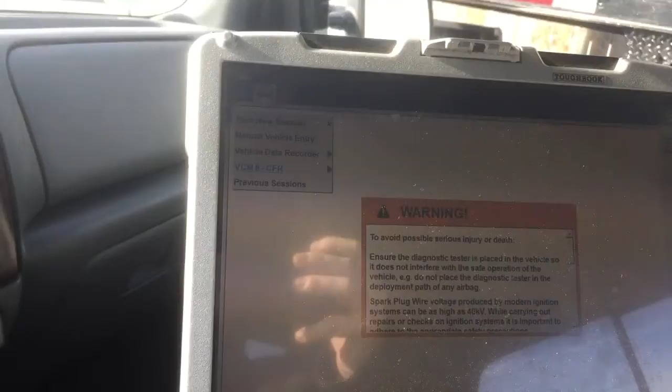This sun glare is going to be pretty bad, but we're going to go ahead and do a cold start. He's got exhaust manifolds leaking. I don't think he's got a Y pipe issue, I think it's exhaust manifolds. We'll take a closer look later. But he's got injector issues too. We are going to do a cold start here and take a look.

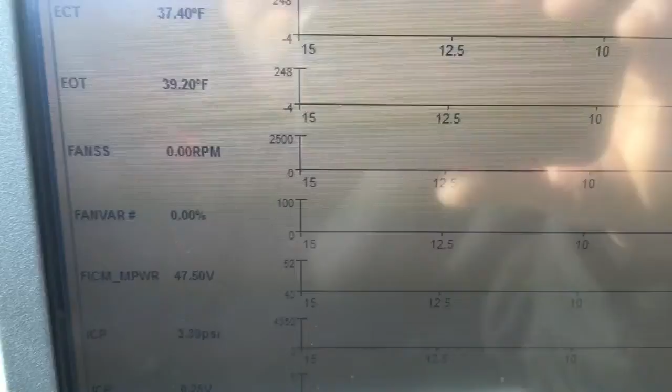Okay, I know this glare really sucks, but let's get it hooked up. FICM looks okay, let's go ahead and fire this thing up. Once the injector chatter stops, here we go.

Alright, here we go. Look at that, it just cleared up. Let's turn compensation off.

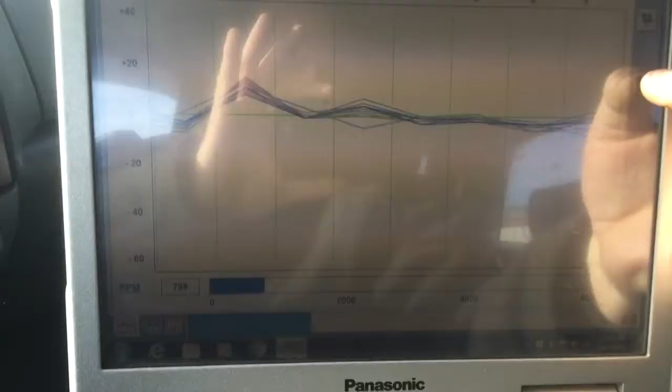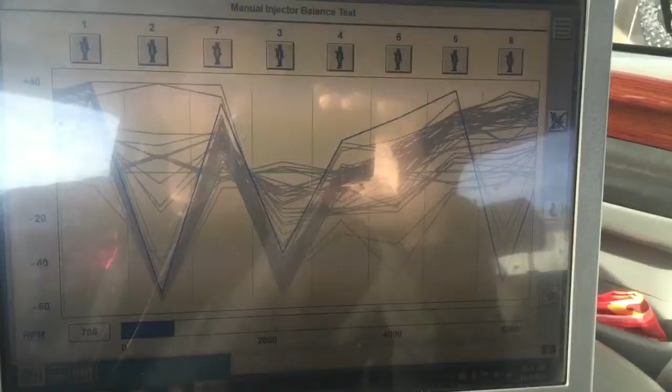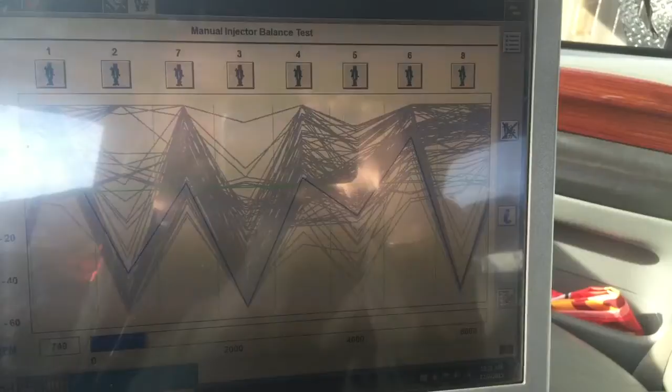I know that's hard to see. Looks like 2, 3, oh shit. 8. I wonder if that's a glow plug issue. I think it's 1, 3, 5, and 8. Or no, 2, 3, 5, and 8 are.

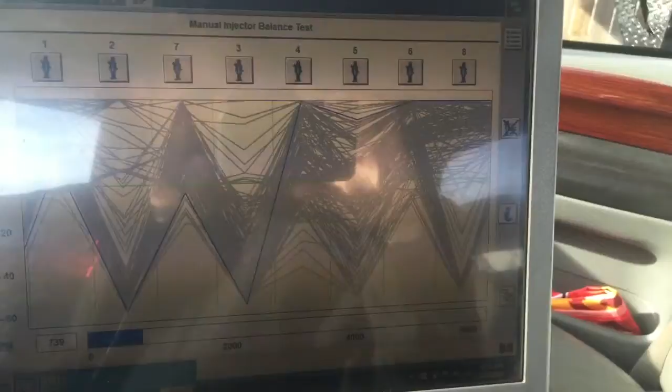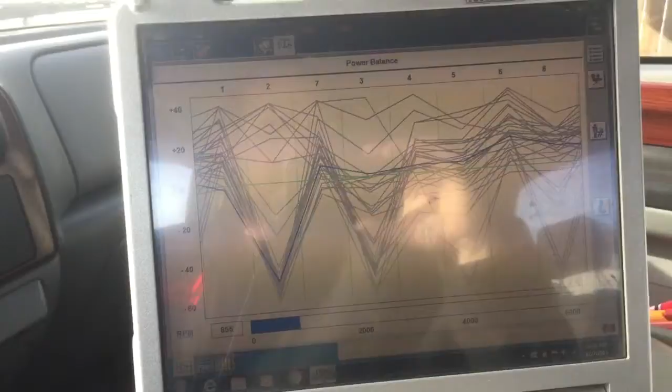That's a damn glow plug right there. Hang on, I'm gonna get this sucker. I'm gonna shut this. Maybe. That's all over the freaking place. I think we need to disconnect and reconnect this glow plug real quick. I'm gonna get it inside before it warms up.

Okay. I don't know, generally a fuel pump issue will show its butt whether the compensation is off or on.

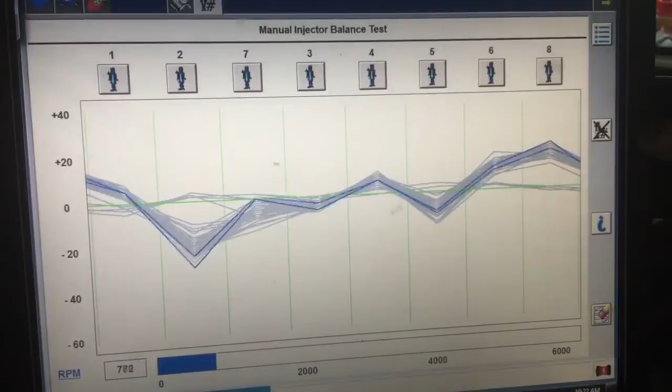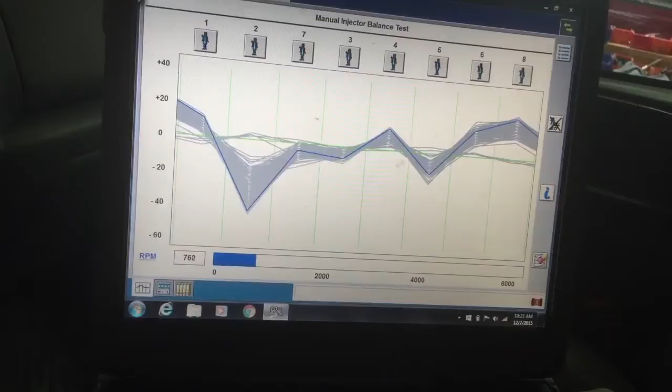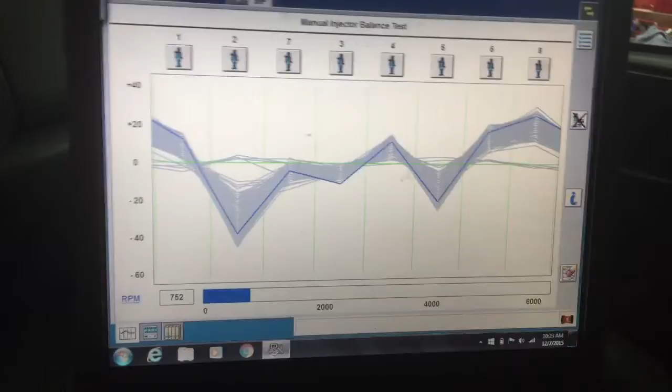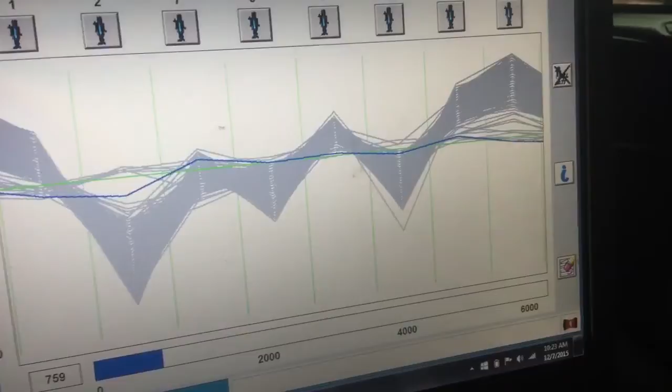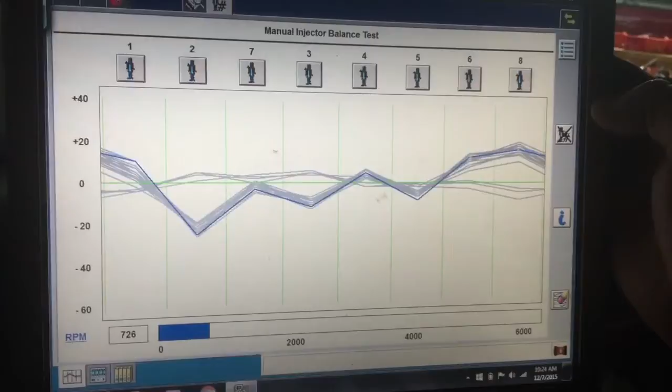It's inside now, but hang on a second. Freaking 2, 3, and 5. Up, just smoothed out. Let's see. Hell, I don't know, I mean, 2, 3, and 5.

Do we need the other ones? I mean, you can never go wrong with replacing the other ones, but I mean, we got 2, 3, and 5 right now. They're getting worse too. Or the idle just kicked up.

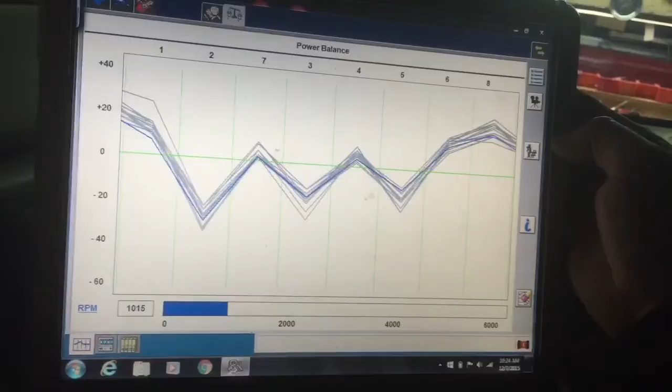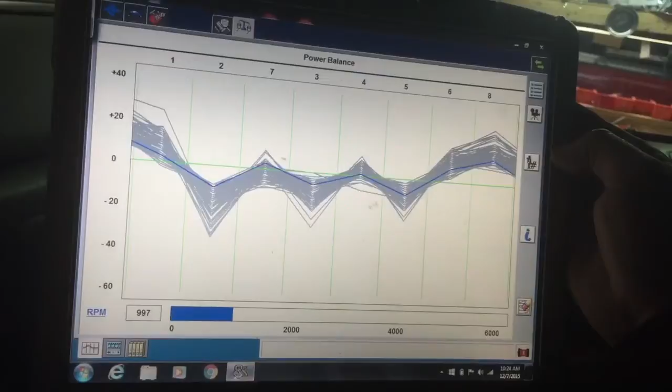See what happens, shut it off, see how long it takes to smooth out. Hang on. Okay, it's not doing too bad right now.

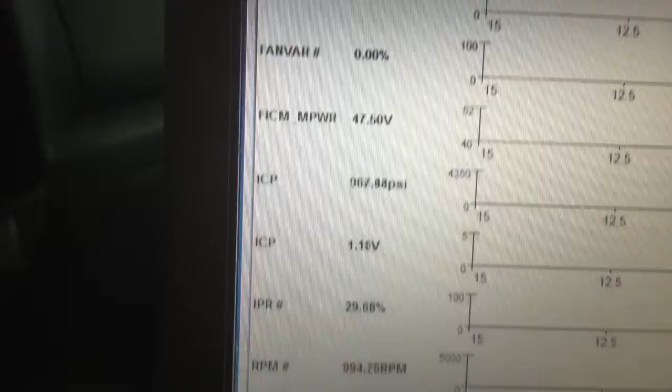Let's go look at our numbers. So our fan speed, I'm gonna pull some codes here. Let's pull some codes, see what we got. Okay, nothing on the codes. No contribution balance.

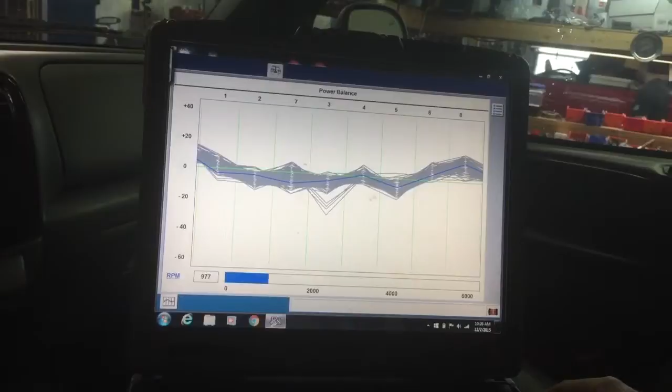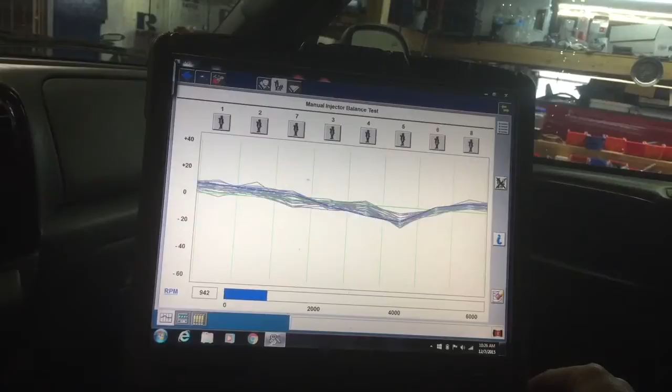But it's definitely, I mean, it's just stiction. That sucks, but you know, let's shut this. I mean, if the wallet allows it, can never go wrong with a full set.

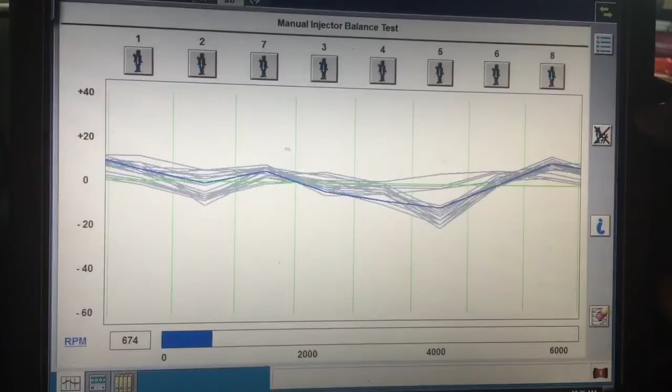Just constantly 2 and 5, 2, 3, and 5, 4 right in the middle of it, getting worked pretty hard. 7 getting worked pretty hard. Mainly it's 5. I mean, look at it taking 4 with it.

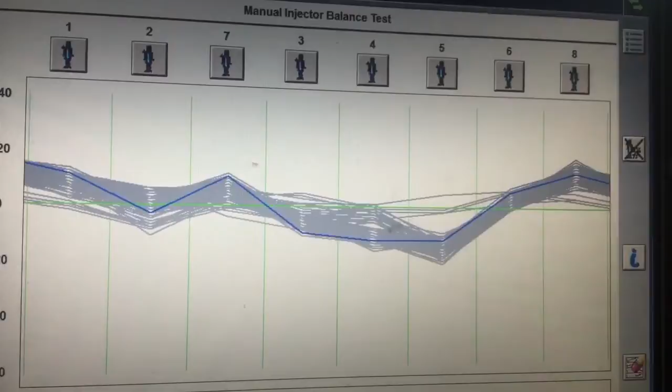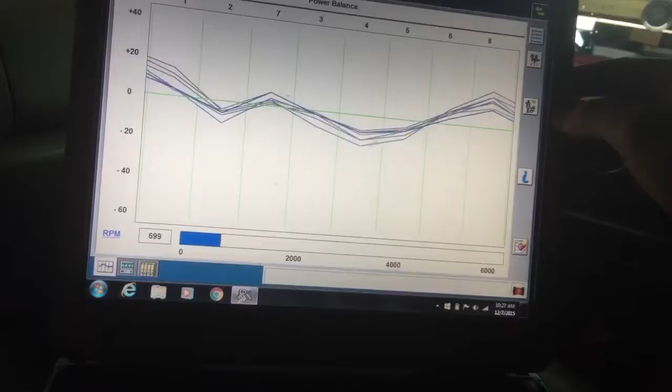The green line is the baseline, that's where we want to see it. 3. So now we're 2, 3, 4, 5. Yeah. Smooths out all right.

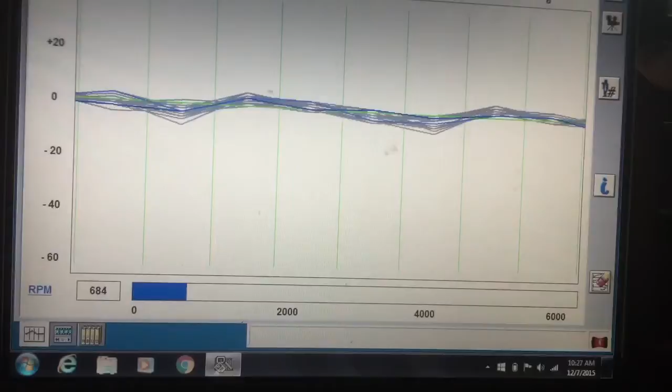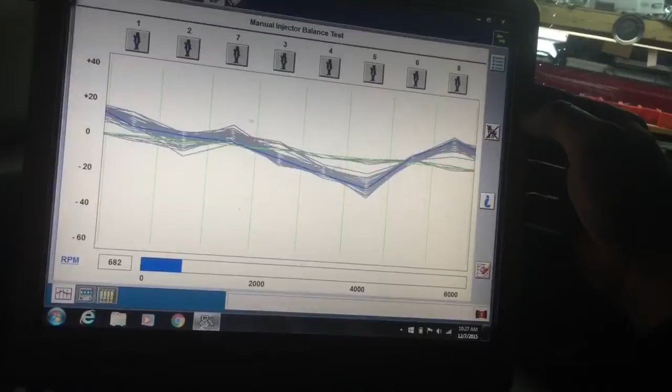We'll let it get up to temperature. We might take it for a drive. I thought it was the fuel pump, but we might... I mean, if it was, it would. It wouldn't be intermittent.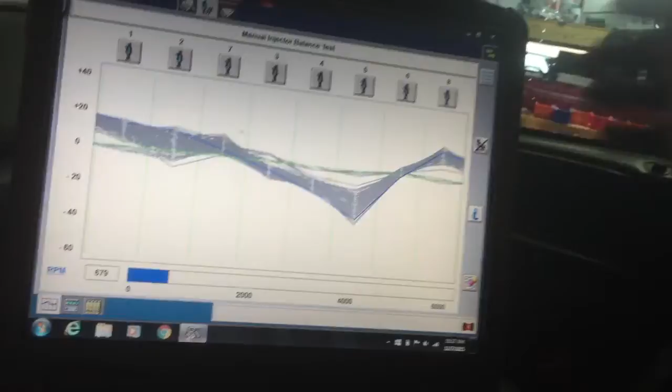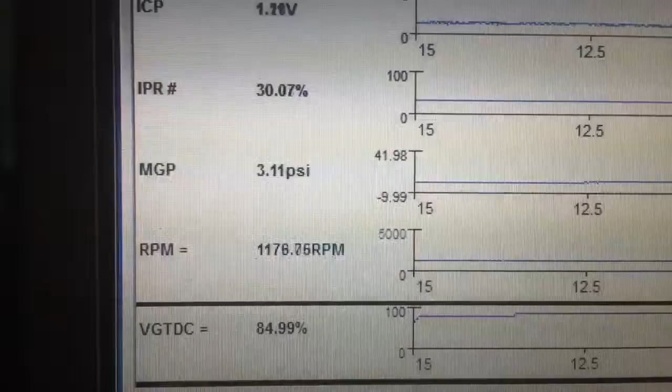Let's get a little more temperature in it. Okay, we want to see that manifold gauge pressure. I mean, it's boosting up at 1200 RPM. Got turbo all the way closed, and we're seeing 3. I mean, that's pretty damn good on the MGP.

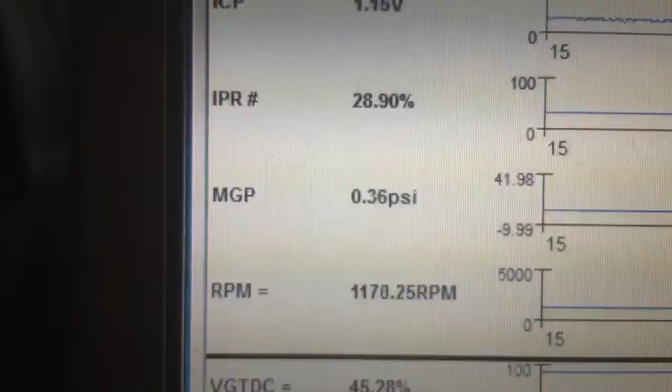And we know it snaps back to 0. Look, I turned the VGT down to 0, and the gauge pressure, so the turbo is not sticking. Now it's going up.

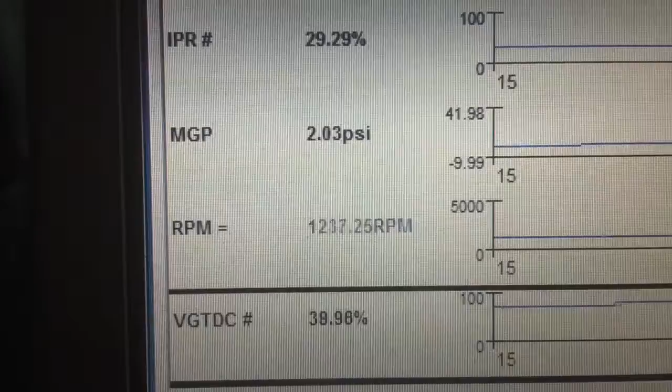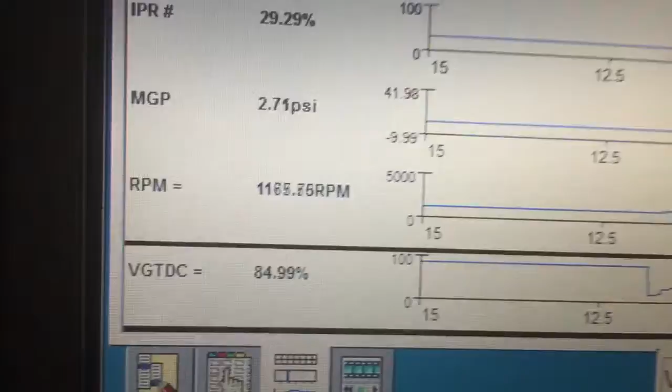So I guess he took it somewhere and they said it needed a turbo, but I mean, the turbo is not stuck shut, it's not stuck open. I can see by the MGP right there that the vanes are actually moving. I mean, it's not seized up, it's not stuck.

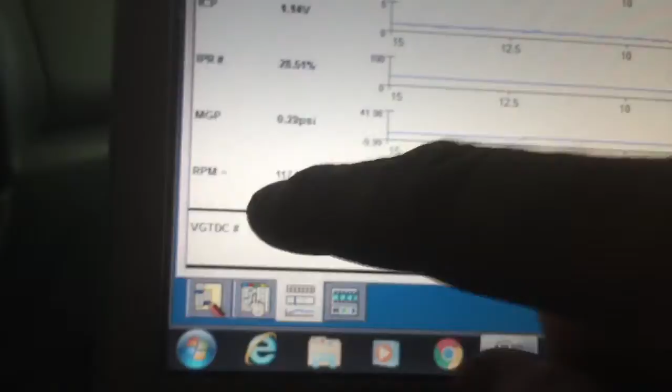Boosting pretty damn good too. I mean, normally I see like 2.1 out of the thing. Let me get underneath it real quick. Alright, here we go. I can definitely hear audible air coming out through the manifold.

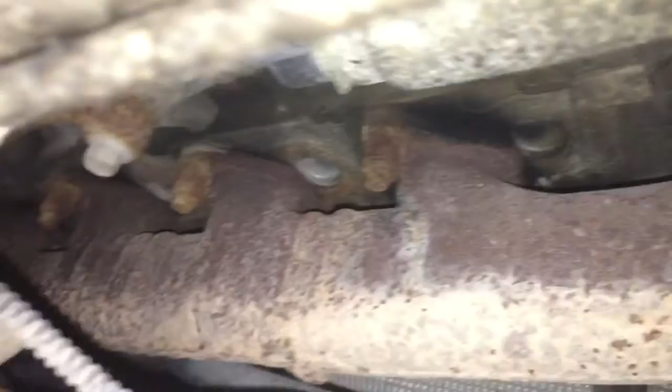I don't know if you can see way back there. Look at the other side. Side doesn't look as bad. Let's see if I can see the Y pipe up there. That's what I'm concerned with, the Y pipe too.

While we're going into it for the manifold, I mean, damn, sure would be nice to do a Y pipe and eliminate all exhaust concerns. But let's get up in here and look.

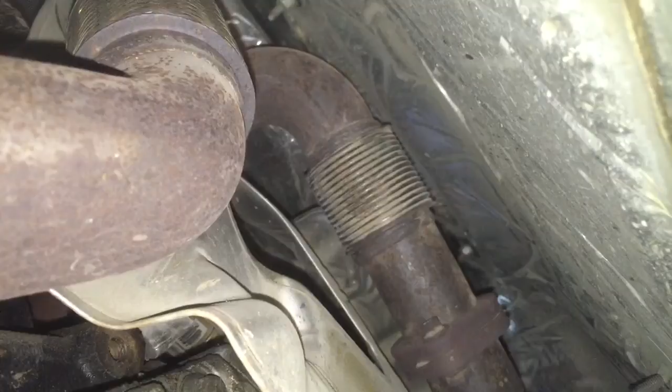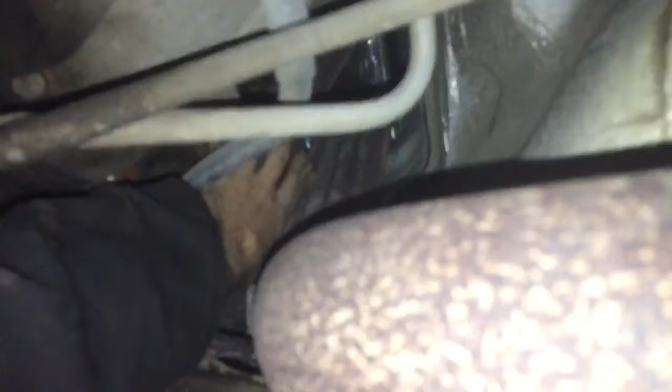Feel around the joint right here where the manifold meets the up-pipe and the Y pipe. Flex joints seem to be okay. Just looking around here, I think I have to...

Let's look at it. See much leaking? Look over here. See the trails around the turbo.

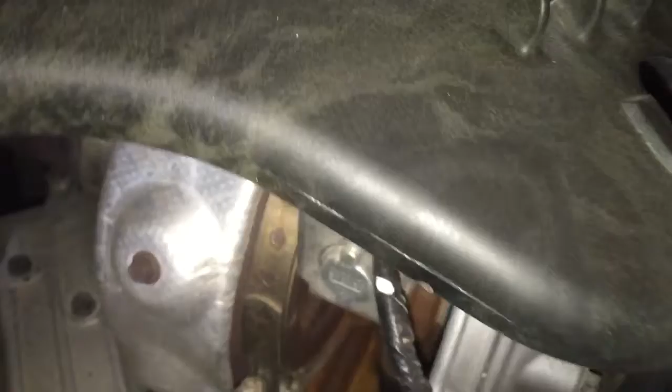High boost. That looks pretty good.

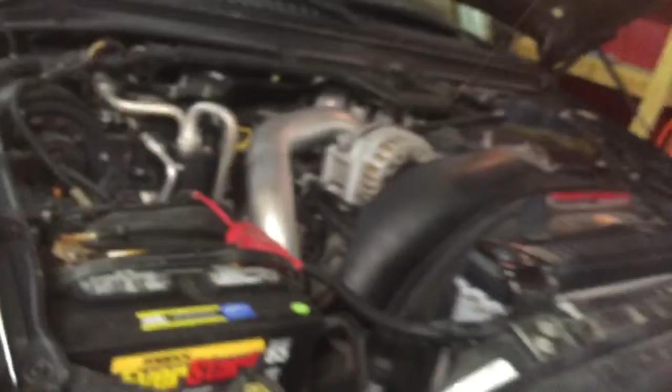So, I mean, the exhaust manifolds, the driver's side didn't seem near as bad as the passenger side. It was definitely, it's definitely spitting out exhaust. It's running pretty good right now.

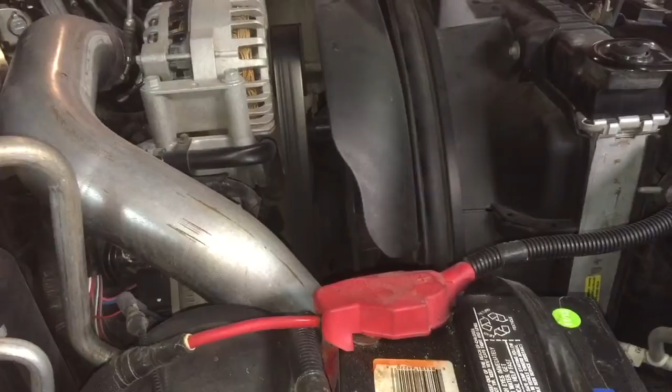Kind of a bummer to think that we're going to put a full set of injectors in it, because I mean, it's running good. But that freaking cold start is the son of a gun. I mean, you guys saw it, it was all over the place.

So let me... oh, shut this off. Let's go back here and see how clear it is.

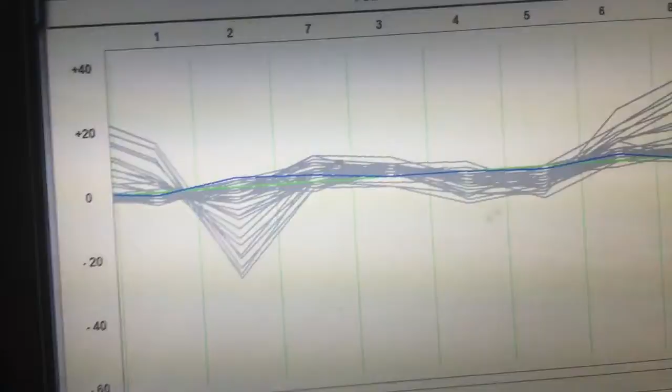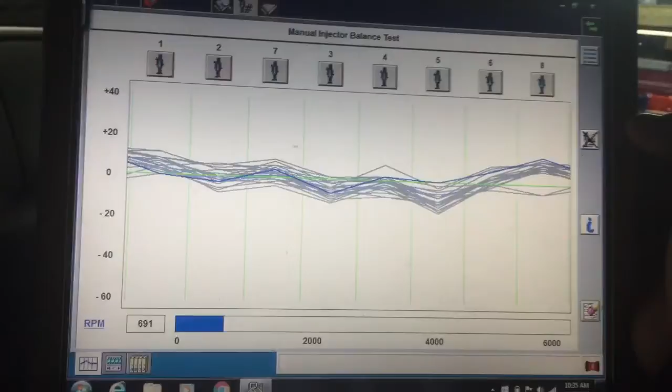Still 2, 3, and 5. See them dropping. Yeah. Which, hell, 2, 3, and 5. I mean, let's put a little load on it.

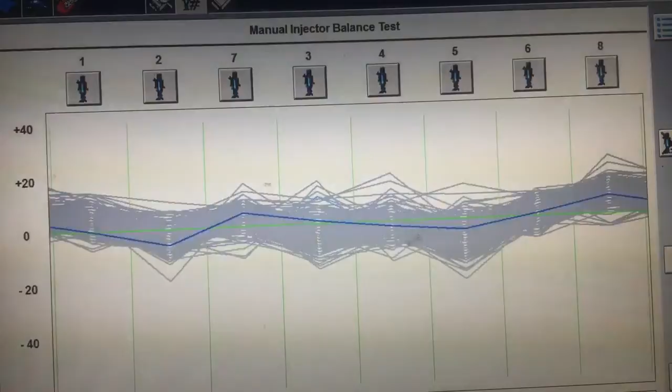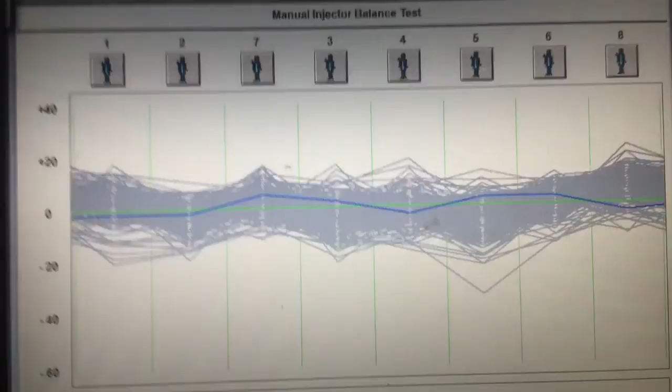Five dropping. You can feel it miss when it's doing it. I'm just recording it all. Heck with it.

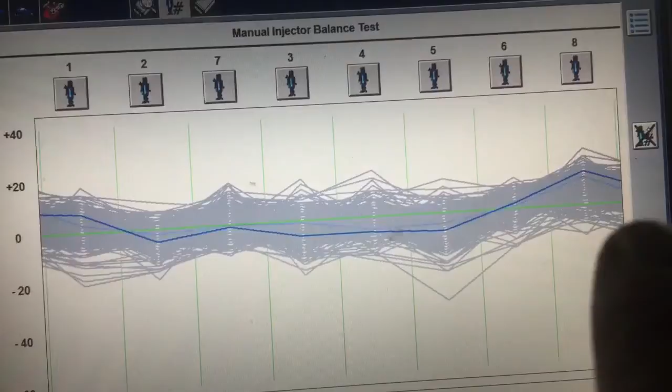We definitely got 2, 3, and 5 for sure. 4 was kind of showing us a little bit, and I think 8 was pretty bad at the very beginning. Damn, that sucks.

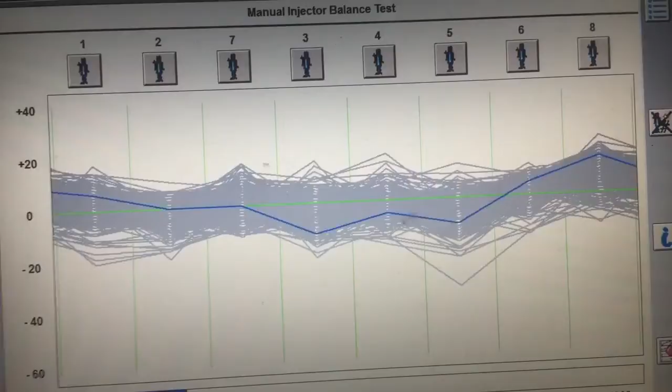I could feel it missing. 2, 3, and 5 are the main ones. And 4 isn't—4's just right in the middle, getting the crap beat out of it. So 4 is getting worked harder.

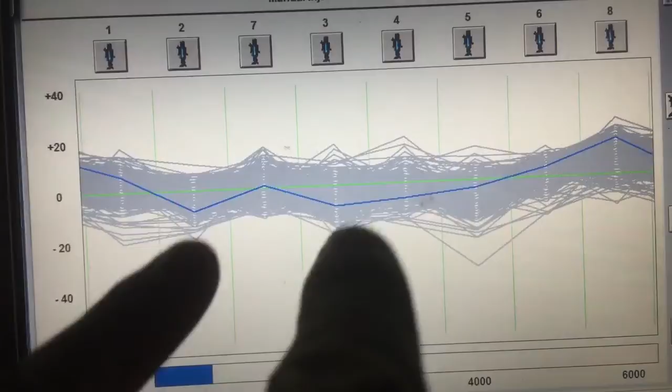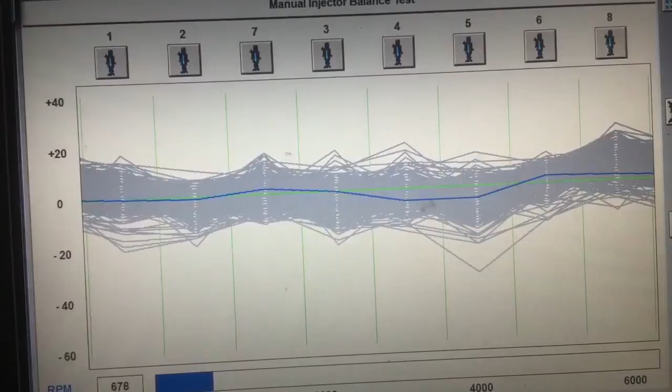But 2 and 3—see, right there, see how 2 goes down and 7 will actually compensate, and then it'll drop back down for 3. So 7's working, 7's still doing its thing. We got 1, 7, and 6 that aren't giving us any indications anything's wrong with them. 1, 7, and 6. Which, crap.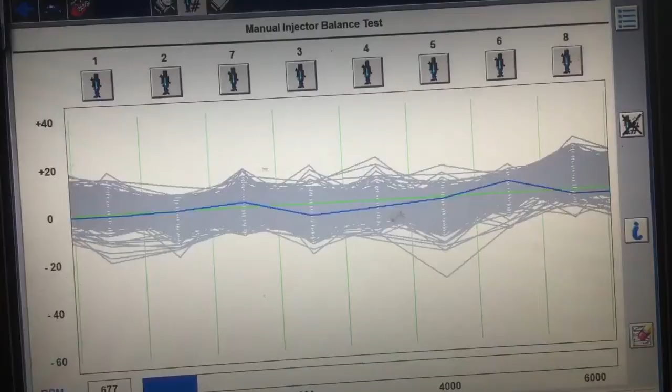Alright, I'm gonna go ahead and upload this. Yeah, there's our cold start. And yeah...

Exhaust manifolds, I mean, what a freaking drag, because it's boosting up pretty freaking good. Let me go ahead and run a boost test. Here, let me get to it. There you go, it's gonna check baro—baro, map, and EBP. Whoa, EBP's a little high.

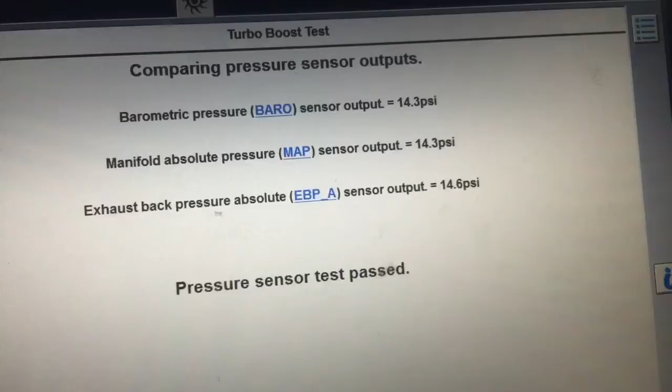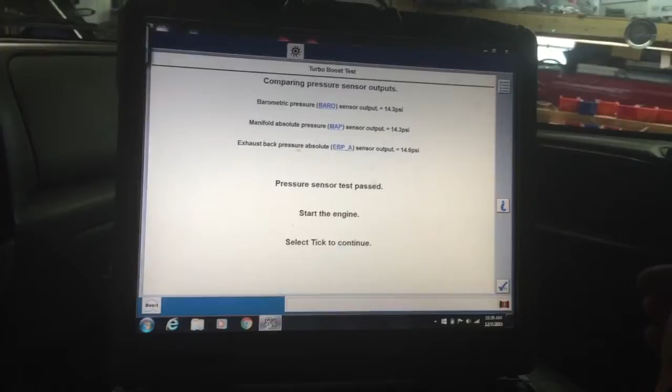We go in there for injectors on that side. We're gonna clean that EBP tube out and see how the sensor looks. That's still within spec, but 14.6 is a little high. I don't know what our barometric pressure is right now, but normally I see it in the 14.1 to 14.3 range. So there might be something stuck in there not letting the pressure relieve out of it. I mean, 0.3 psi, that ain't bad.

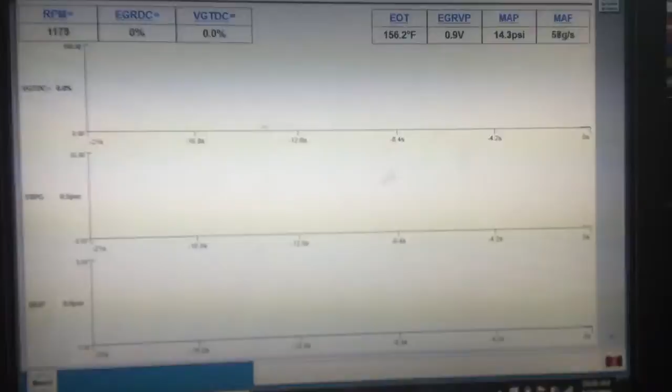But let's go ahead and fire this thing up. Here we go. This closes the EGR valve. We want to see this bottom up here. Yeah, I mean, it's good—it's boosting. They told me we needed a turbo.

No, we got 2 point—this is more like normal. I was probably getting a little bit of back feed from the EGR valve. Yeah, 2.68. It's boosting. It's not—if we do need the manifolds, which we do, they're leaking—it's not affecting it too much, but I think he can smell it in the cab.

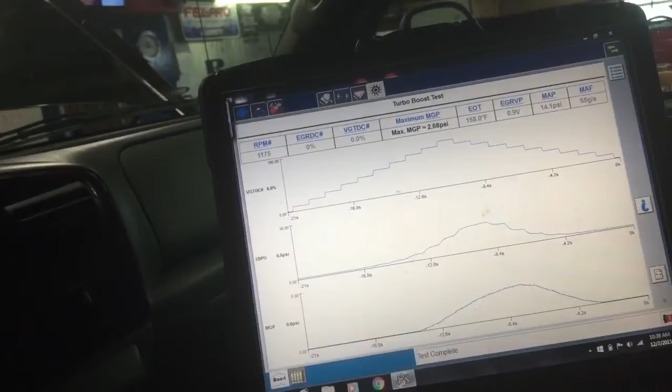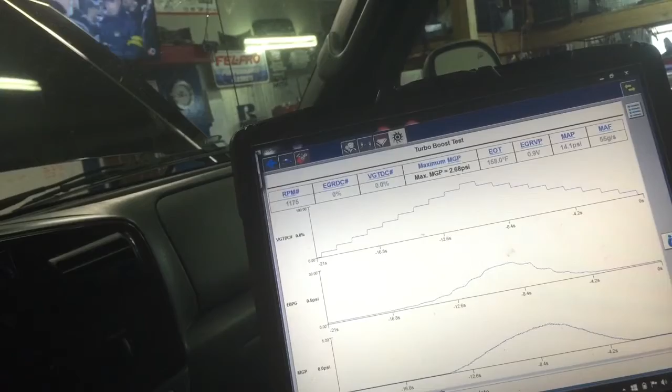The Y pipe appears to be okay, I don't see any streaks around it, so generally that's a Y pipe issue, but these manifolds are leaking—you can see it. So I would almost stick to it. We don't need to touch the turbo, but what sucks is it really sucks to go in and do all this for exhaust manifolds and not just eliminate all the issues and put our Y pipe on. Let me show you the Y pipe.

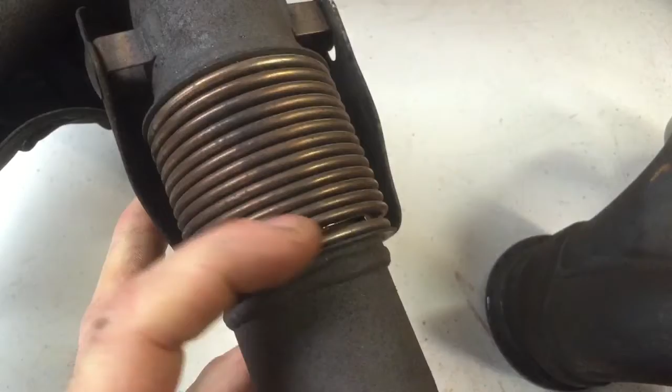Okay, here's what we do. We actually take these, we make them here. We TIG weld them here, but you can see, like right here, this is what happens to them. You can see it just split right here. So we cut them up, TIG weld them, and put these on. The question I always ask customers is, which one would you rather have—this one or this one?

The only thing that's a bummer is the turbo has to come off. But if we yank the turbo off, and we're already disconnecting it at the bottom and the exhaust manifold, all we're going to have is turbo R&I. We could clean the turbo, but we don't need to. I thought I'd at least show that so you can get an indication of what I'm talking about.

There's one that's split right there, it's a real thin accordion style joint, and they break a lot. Look at all these I've got here—I've got more to be cut up right there. So it's not something we're just trying to upsell. I mean, yeah, an upsell is always an upsell, but are we fixing an issue? You tell me.

There's a whole bunch of these Y pipes that crack, and when they crack it really whistles loud and spits exhaust in the cab—it turns into a pretty nasty deal. All of my trucks have these on them, every single one, because I have not seen one of these fail yet. I've been putting them on for about 2 years now and haven't seen any fail. These, shoot, all the time.